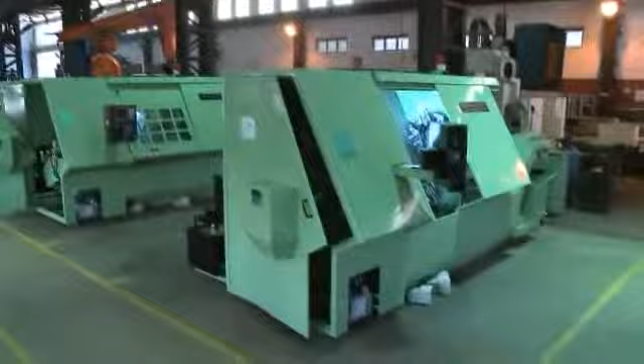We are in the turning machine segment, and right now we have 22 versions of this machine. We follow ISO 9001:2000, and we have also taken CE marking so that we can go ahead with the global market as well.

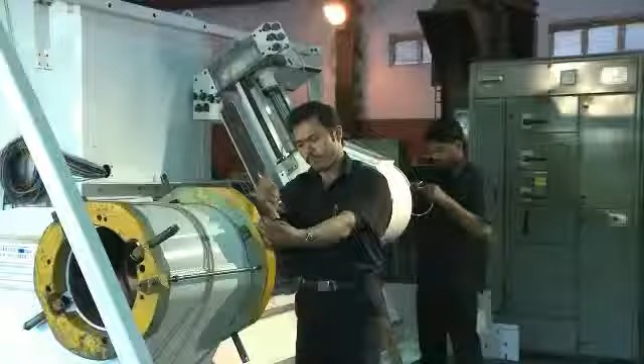Prior to using Solid Edge, we did a lot of manual work. The error rate was significant, and the time taken to make the design and developmental work was very high. So we thought of going for Solid Edge.

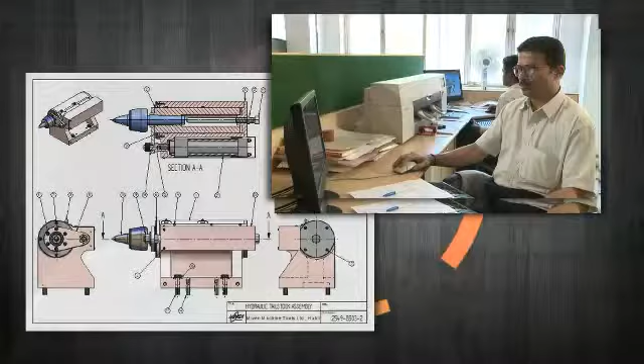We evaluated various CAD software and found Solid Edge with synchronous technology to be the most efficient. It has the functionality to import 2D drawings into it and does changes in the designs much faster and quicker. A person from the manufacturing unit can understand and visualize the designs much better from the 3D drawings. It's because of all these features that we decided on Solid Edge for our company.

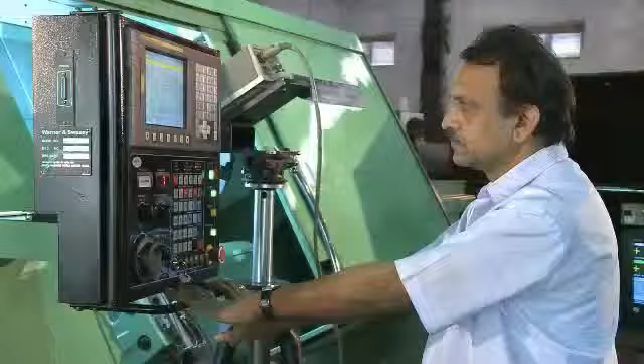In any machine tool industry, there are a lot of things which don't necessarily follow a set pattern, and we require corrections. For helping us out in this direction, we feel that the software from Solid Edge has helped us a lot. Basically, in the 3D mode, we are able to understand what are the pros and cons, what are the clearances. So the time wasted in correction is eliminated, which is very huge.

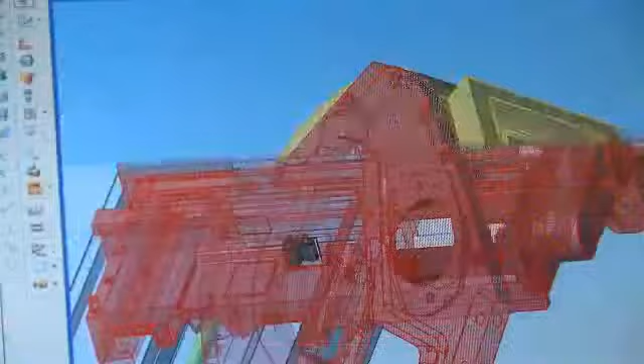Using Solid Edge synchronous technology, it's very easy to create 3D models. It facilitates quick updates in the designs and allows history-free modeling, reducing the limitations faced by the design. All these features make design concepts clear to the entire team.

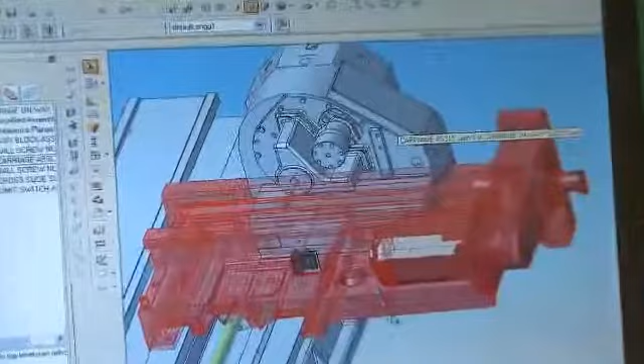Using synchronous software technology, we have reduced design cycle time by 50 to 60%. In our company, around 80% of the designs are now being done using Solid Edge synchronous technology, and the remaining 20% are being done using other 2D CAD software.

It's very easy to design and simulate the working of in-place assembly parts like way-block carriage, tailstock, steady rest movement, and other components of a CNC turning machine.

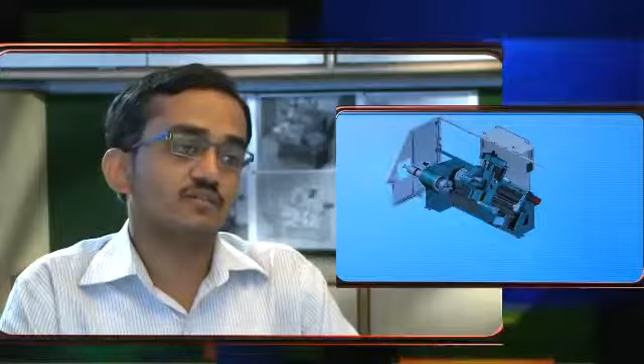Our designers are also very confident to communicate with our customers about their requirements and their concepts. Synchronous technology has made component editing much faster.

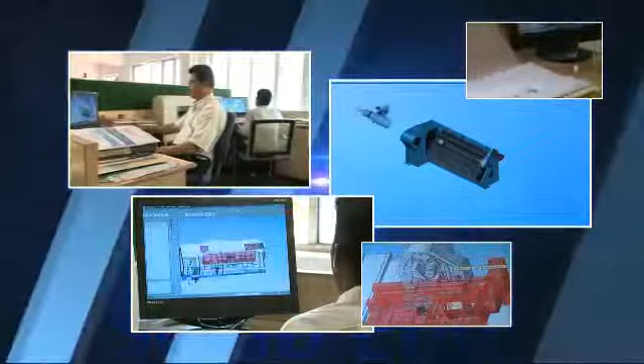If a customer provides us with a 3D model, we can do modification in the design and send it back to the customer for approval. Instant modification makes the designing process much faster.

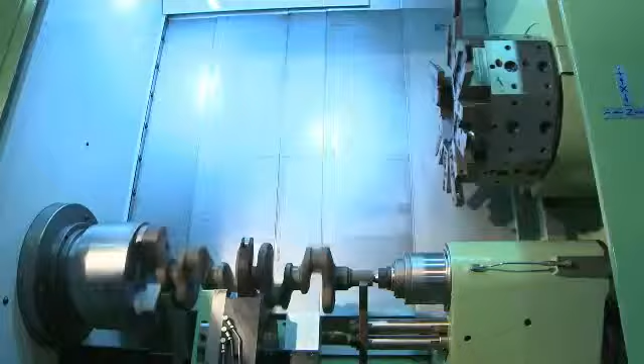I'll definitely recommend Solid Edge synchronous technology to all our suppliers and vendors. It has led to huge savings in terms of time for us in completion of the projects due to its faster design capabilities. This software has allowed us to take on more new projects and grow our business further.

Whatever little association we have had with Siemens, it has been very good, and with Solid Edge also, it has been good. So I feel that in the future we'll join hands and see how from there we take it.